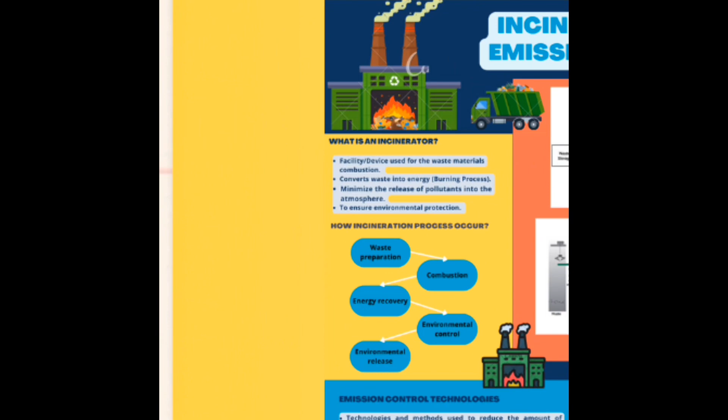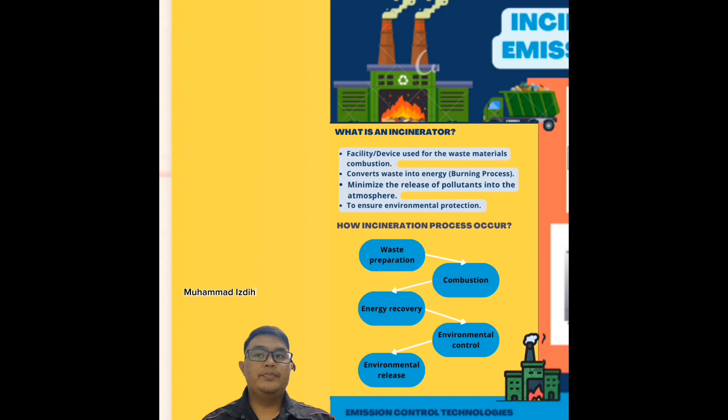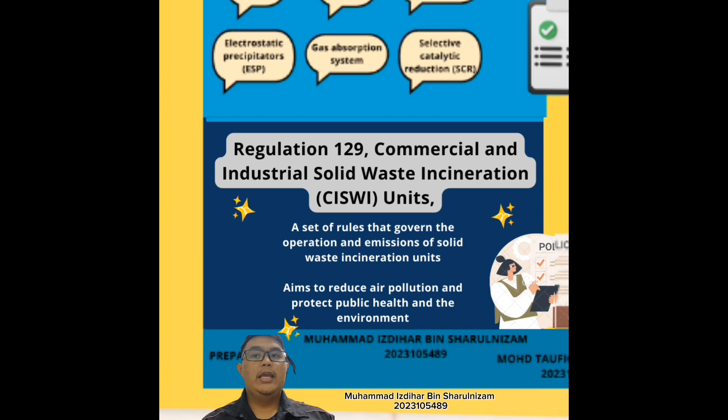Generally, when we talk about an incinerator, we think of a furnace used in the process of burning solid waste for the purpose of reducing the volume of waste by removing combustible matter. Based on Regulation 129, commercial and industrial solid waste incinerator units, this operation must be done properly, aiming to reduce pollution and protect public health and the environment.

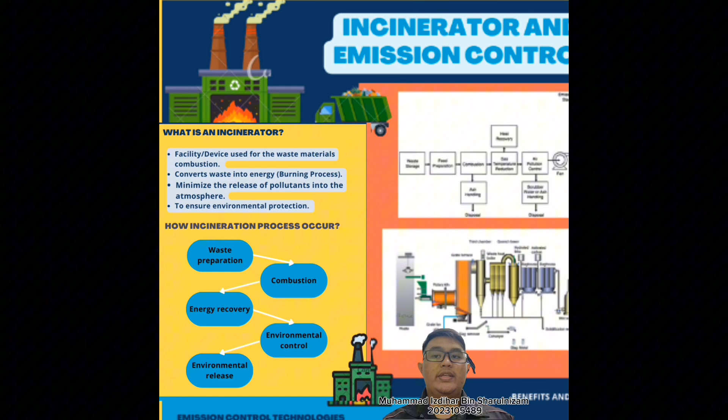So how does this process occur? The incinerator process involves the combustion of waste materials at high temperatures, typically in the range of 850 to 1000 degrees Celsius, to break down organic and inorganic molecules and reduce the volume of waste. The process requires three essential components for combustion to occur: a fuel to be burned, a source of oxygen, and a source of heat.

When waste is introduced into the incinerator, it enters the burning chamber in a controlled manner. The waste is dried to facilitate its volatile properties, and then the high temperature flame zone of a well-designed incinerator breaks down the waste to allow reactions between most organic and many inorganic molecules.

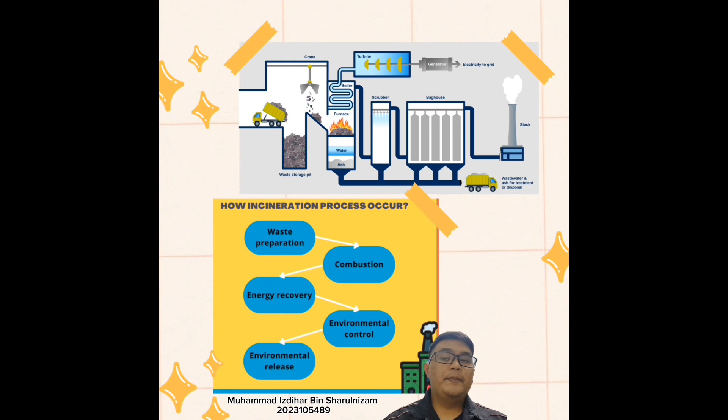The combustion process releases heat energy and exhaust products, and it can be controlled or stopped by regulating the amount of fuel available, the amount of oxygen available, and the source of heat. The proper incineration of contaminated material is important for preventing and controlling exposure to harmful substances, and it requires temperatures of over 850 degrees Celsius, with even higher temperatures needed for the destruction of large amounts of contaminated material.

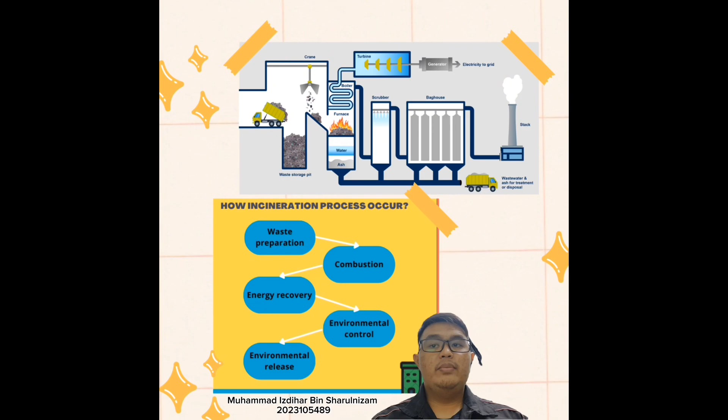The first one is the burn pile incinerator. It operates by providing a controlled environment for the combustion of organic waste such as leaves and branches. It is typically constructed with metal rings or walls. The incinerator allows for containment of materials as they undergo ignition and subsequent combustion. Adequate airflow is facilitated through openings or vents, turning the burning material into ash, water vapor, and carbon dioxide.

The next one is the pyrolytic chamber incinerator. It employs a process known as pyrolysis for the controlled thermal decomposition of waste materials. Organic substances are heated in the absence of oxygen, causing them to break down into volatile gases, liquids, and char. It is designed to be more efficient and environmentally friendly than traditional open burning methods, as they minimize the release of pollutants and can potentially recover energy from the process.

The third one is the rotary kiln incinerator. It operates by subjecting waste materials to high temperature in a rotating cylindrical drum. The waste is fed into the kiln, and as the drum rotates, the intense heat generated by the combustion process within the kiln causes the waste to undergo thermal decomposition and oxidation. It involves the conversion of organic materials into ash, gases, and other byproducts.

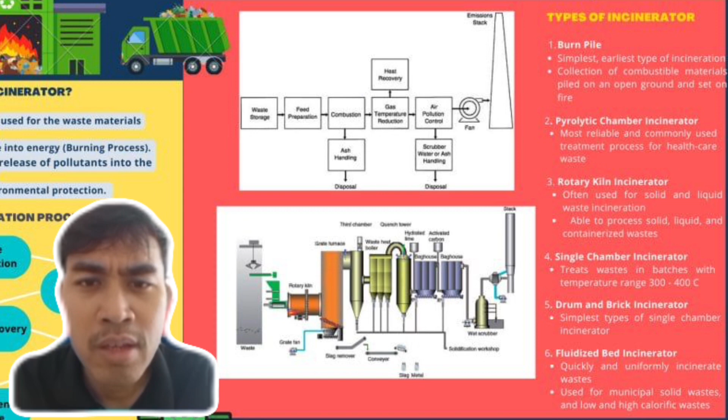The last one is the fluidized bed incinerator. It operates by suspending waste materials on a bed of inert particles, typically sand or other granular materials, within a combustion chamber. The high temperature in the fluidized bed incinerator facilitates the complete breakdown of organic waste into ash and other byproducts. It also offers advantages such as enhanced heat transfer, reduced emissions, and the ability to handle a variety of waste types. It is particularly effective in treating hazardous waste and is known for its energy efficiency and environmental performance.

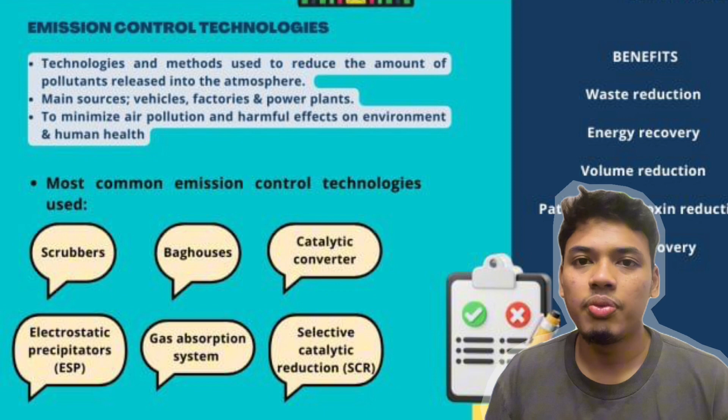Let us collectively champion this innovation and work towards a future where the air we breathe is free from the shackles of pollution, ensuring a sustainable and vibrant world for generations to come.

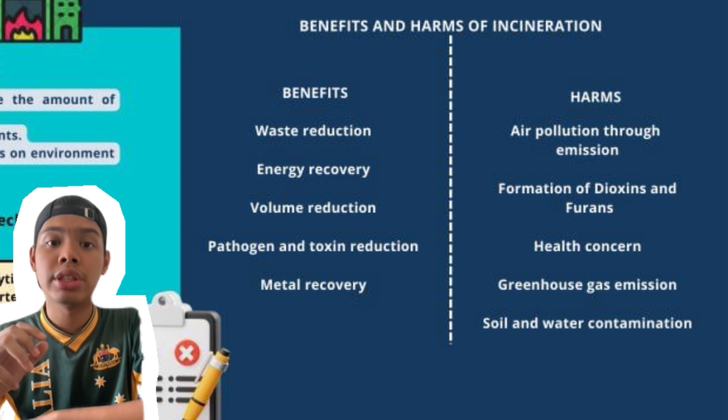Next is energy recovery. Incineration offers energy recovery through combustion, generating steam and electricity through turbines. Volume reduction is also a benefit of incineration because it significantly reduces waste volume.

Next, pathogen and toxin reduction. Incineration effectively destroys pathogens and toxins in medical waste, preventing disease spread and reducing environmental impact due to the high temperature and neutralization of toxic substances.

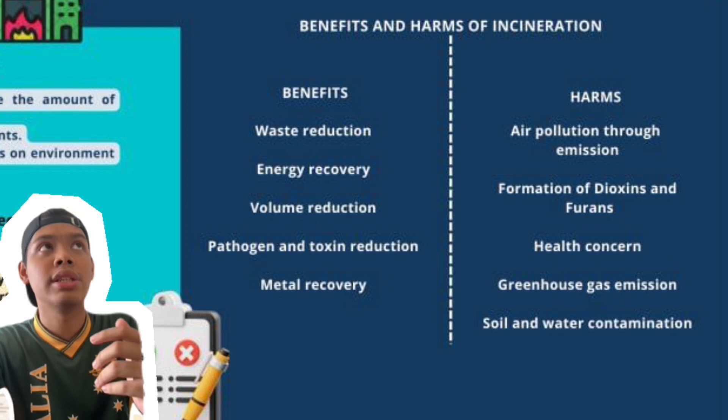And last but not least, incineration can also enable metal recovery, such as facilities that use technologies like magnetic separation to recover valuable metal from ash, reducing the need for virgin material and contributing to resource recovery.

So for the next part, the harms. Air pollution through emissions can harm from incineration. This is because incineration releases pollutants such as NOx, sulfur dioxide, and VOCs into the air, causing poor air quality and respiratory health issues.

Next, it can cause the formation of dioxins and furans, a significant environmental and health risk from combustion of material, necessitating stringent control measures and advanced air pollution technologies.

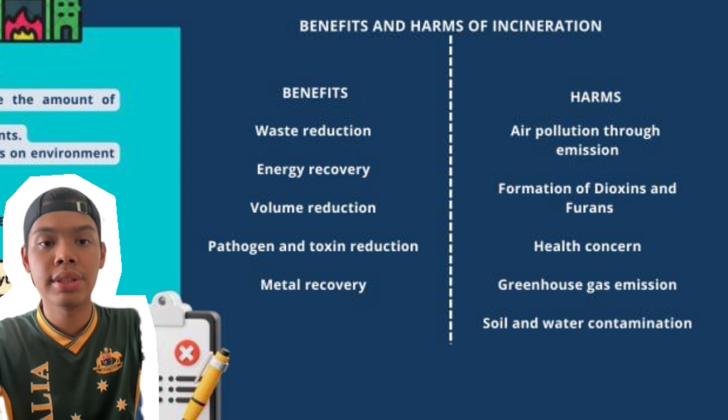Next, it can harm our health, and we need to be more concerned because incineration releases pollutants including particulate matter. It can harm and risk the health of communities, especially in residential or sensitive areas near incineration facilities.

Greenhouse gas emissions are also a harmful part of incineration, because despite its energy recovery benefits, it contributes to greenhouse gas emissions, releasing carbon dioxide, a significant concern in climate change mitigation.

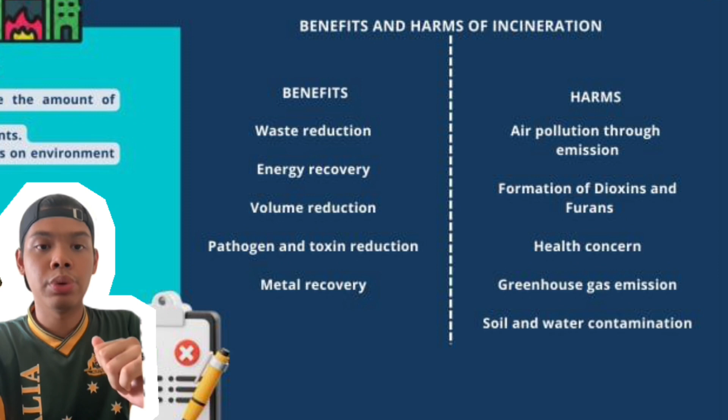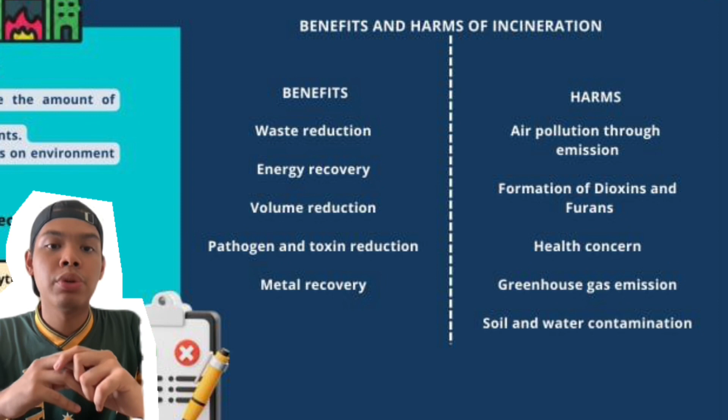The last one is soil and water contamination. Incineration, including ash, can contain harmful substances leading to soil and water contamination. Improper disposal can infiltrate groundwater, causing environmental and human health risks.

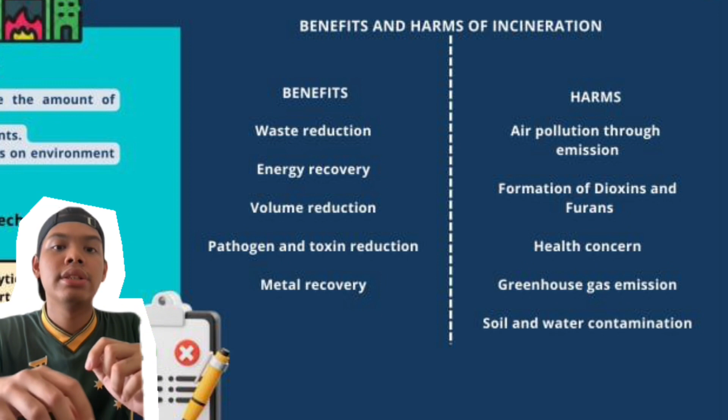So in conclusion, it is important to note that incineration offers environmental benefits but also poses pollutant and greenhouse gas risks, necessitating advanced technologies to balance the benefits with environmental protection.

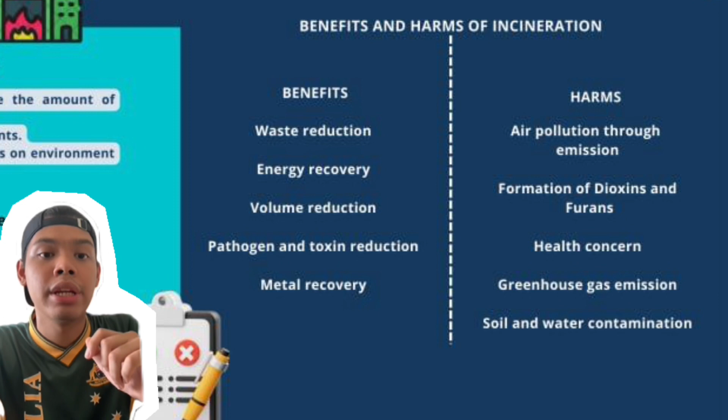Advancement in technology and strict regulation have mitigated incineration harms, but careful monitoring, proper waste sorting, and effective pollution control measures are crucial for minimizing environmental and health impacts. So that's all for me.

Thank you. Next, we dive into the intricate world of pollutants emitted from incinerators, shedding light on the diverse array of substances that pose challenges to our environment and human health.

Lead, a toxic heavy metal, is released during incineration with potential severe health implications, particularly affecting the nervous system and cognitive function. Sulfur dioxide, a major air pollutant contributing to acid rain formation, is another concerning byproduct, posing risk to respiratory health and overall air quality.

Mercury, a potent neurotoxin, finds its way into the environment through incineration, posing threats to aquatic life and human health. Dioxins and furans, persistent organic pollutants, are also generated, linked to a range of health issues including cancer.

Particulate matter from incinerators comprises tiny particles that can penetrate deep into the lungs, causing respiratory problems. Carbon monoxide, a colorless and odorless gas, is released during the combustion of waste, with detrimental effects on the cardiovascular system. Nitrogen oxide, contributing to air pollution, is another byproduct of incineration.

Acidic gases and various metals, including hazardous heavy metals, are released, posing risk to ecosystems and human health. Polychlorinated biphenyls, or PCBs, and volatile organic compounds, or VOCs, further contribute to environmental contamination and health risks.

This complex spectrum of pollutants underscores the urgency for implementing robust emission control technologies, such as scrubbers, baghouses, and catalytic converters, to mitigate the environmental and health impacts associated with incineration. In striving for a sustainable future, we must address these concerns to ensure that waste management practices are both efficient and environmentally responsible.